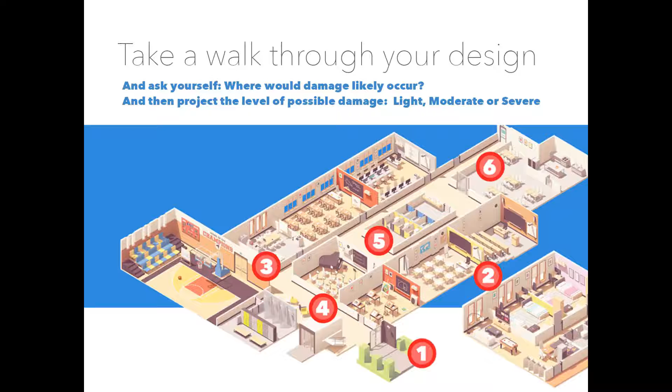And even if you go into your local grocery store or other, just throughout your daily life, I know with the position that I'm in now working at Inpro, I notice if there's scratches, dents, dings anywhere in doors and walls, it's almost a sickness, but you'll really start to notice those areas that aren't taken care of. So through that kind of observation and experience, you can provide a clear direction in identifying the location and types of interior protection that are needed.

So we'll kind of begin here with the guts of the building. You obviously know what drywall is. It's the baseline wall construction material. There's also cement board, which offers increased resistance to higher levels of abuse and may be used in moisture applications. So it's often used in selected areas that require that moisture resistance. You have fire rated plywood, which offers an increased resistance to higher levels of abuse and also a more secure fastening for mechanical systems to the wall, for example, like a handrail or a wall guard. Those are used in targeted areas to increase protection from known or anticipated heavy abuse.

And then CMU wall systems, concrete masonry units. These are the 2-hour fire rated walls often seen in school gymnasiums and mechanical rooms. CMU walls may be cladded with wall protection materials to help reduce the need for repainting or even soften the look aesthetically and look less like brick. They must, though, if you put wall cladding on them, be sanded to a matte finish with a thin coat of compound to prevent any telescoping through the sheet material. You don't want to be able to see the glue or the grout lines through the wall protection product. With CMUs, adhesive will take longer to set up for the installer because it can't evaporate as readily as with other substrates listed here.

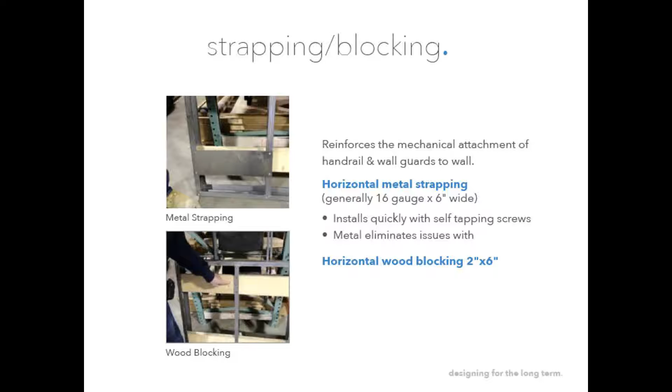So two main options would include metal strapping and wood blocking, which are spaced 16 inches on center with vertical studs. Metal strapping is generally done with 16 gauge by 6-inch wide material, plus a 1/2-inch layered plywood. And then self-tapping screws would adhere the handrail product or wall guard product to that. In the wood blocking scenario, usually 2x6 boards are used with a gypsum board 5/8 inch thick over the top.

So now we're going to turn our attention rather to the individual elements of wall protection and concentrate on two specific topics. The first being wall cladding. For wall cladding, just think of applying materials to protect large areas over the face of a wall, so big spaces. And then targeted wall protection would be the other. Obviously, as the name implies, this would deal more with products that are specifically designed to absorb impact and protect the underlying wall.

The first good example of a wall cladding protective product would be flexible wall protection. So with flexible wall protection, they're products that have really been gaining popularity. They're an 040 nominal thickness, which is as thick as many rigid wall protection products in the market. But they offer a nice aesthetic look and more of the feel of a vinyl wall covering. So if you're familiar with type 2 wall covering or type 3 wall covering, the flexible wall protection is the newest version of that. I like to refer to it as sort of wallpaper on steroids.

Flexible wall protection can withstand moderate abuse without looking like most traditional wall protection options because it's adhered to the wall similar to wallpaper. So it has that seamless appearance to it when it's the finished product. And what designers and architects have really loved about it the most is that it has a nice texture to it. Each pattern has its own unique texture, and there are many patterns and colorways available. We see it most often specified in both healthcare and hospitality applications. It looks great in common areas such as lobbies, meeting spaces, cafeterias or corridors.

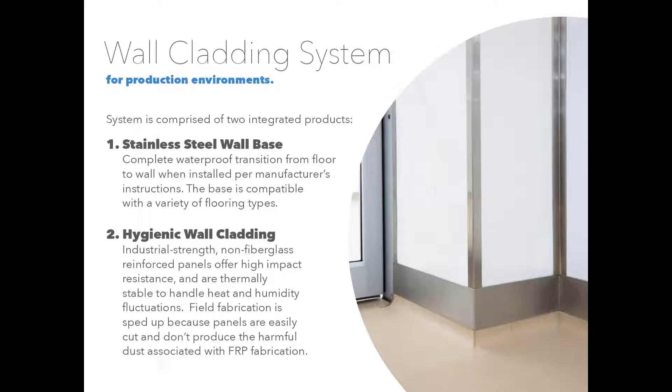Once it's installed, the product itself can be pressure washed, and intensive disinfectants can be used. So that's where we really see it as a nice sort of value engineered option to the solid surface product I just spoke of. It's less expensive, but still rated well for the environment that they're meant to go in.

What I would say has been the most popular product, at least from a designer's perspective over the last several years, would be printed wall protection. Especially when trade shows were a thing before COVID, this really got the most attention. So it's really a designer's best friend because it can add a personalized and customized element to any design space.

You can choose from high resolution images from a reputable online source like Getty Images, or you can provide your own custom photography, so long as it meets certain photo quality standards. You can't just take a cell phone picture with your iPhone and use it once it's blown up on a wall. But as long as your custom photography met a certain level, it can be done.

And then with that image, it is printed on the back of a clear PETG sheet. And that's really important because it's printed on the back of a clear sheet. If you scratch it or anything like that, that ink isn't going to come off. So your image is completely protected on the back side of the sheet.

Most often we see printed wall protection specified in common areas of buildings, such as an elevator lobby or even just feature walls. Basically places with a lot of foot traffic where you really want to show that art piece off and you want it to be appreciated. Nature scenes are really common. They obviously promote a nice biophilic design element for healthcare.

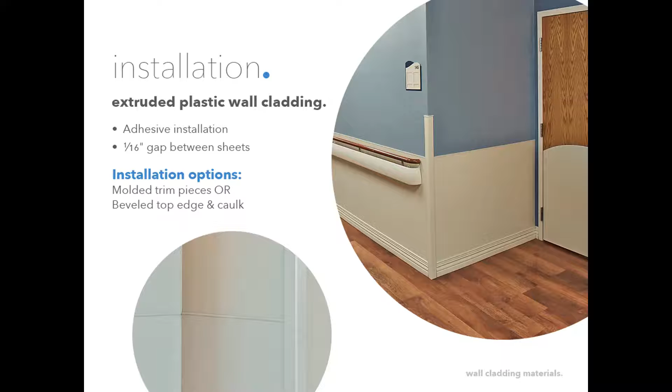Trim pieces are available to complete the look, or color match caulk can be used as well to help seal all the edges and seams. Regarding the decision whether to use caulk or trim, it's really up to the designer on what the look is that they want to achieve. An additional consideration in finishing the sheet, whether it be through the trim pieces or the color match caulk, there's really two factors that go into making that decision. I mentioned the aesthetic look of it.

The application of trims provides a more highly finished look to the installation, and caulks finish the seam only, but they do provide some appearance smoothing by making the seam look less visible, the color matching aspect of it. But there's also the cost. The installation of trims can be more expensive because it's more time consuming on the installer to do. And then obviously cutting the trims and placing them. So caulk can be a less expensive option, and less labor intensive.

One small bit of caution on applying trim to sheet, the trim pieces do protrude a bit from the wall. So it would be possible for a cart or gurney or wheelchair or something to snag and tear off that trim piece. It's rare, it hardly ever happens, but it can happen. Caulk may be the better finishing option for seams where the snag potential could be high.

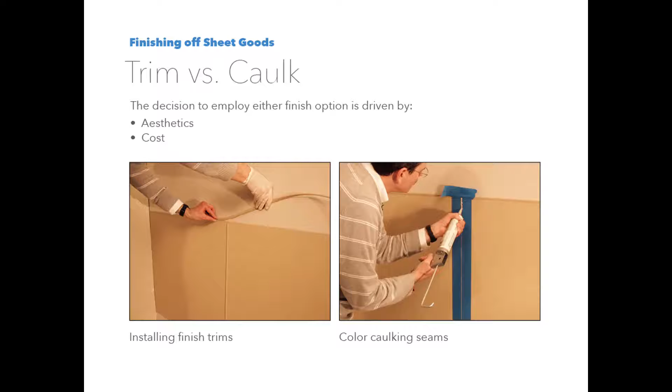I mentioned earlier that sheet wall protection can also come in rolled goods. And the main benefit of a rolled sheet product is the contractor then can determine himself or herself the length of pieces that they really need. So it can really reduce seams on the wall. However, we do still recommend that there should be no lengths greater than 12 feet without a seam to help allow for that natural expansion and contraction that can occur. Another benefit of rolls, if space is limited on a job site, or there's not a lot of storage space, rolls come in a nice, tightly wound box. So just another thing to consider.

It's a very durable product, sheet is. It's designed to last a lifetime. It's not a temporary solution. And it can stand up to common and harsh cleaning products, which is obviously especially important in healthcare. If in the future color trends change, or you may want to replace the sheet material with something new, the wall cladding can be removed, but it will take that paper layer of the drywall off with it. And then that sheet can no longer be recycled because there would be adhesive and drywall residue on that product. However, a solution, it is possible using a contact cement type adhesive where you could install sheet over the top of existing sheet.

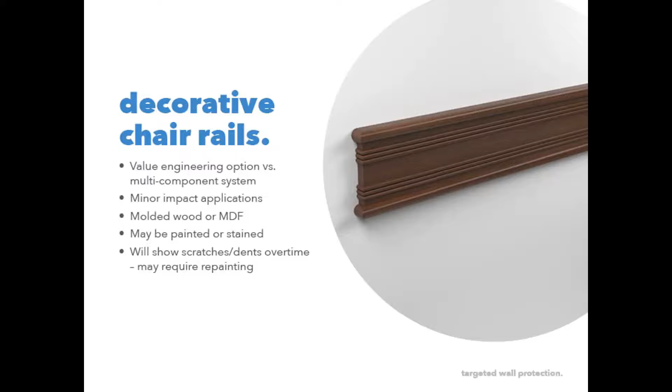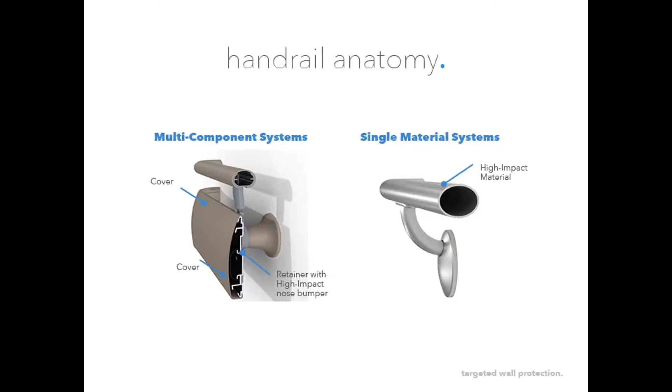So with handrails, there are tons of different shapes, sizes, widths, and different looks that you can get. But what's consistent among handrails is they need to have that similar gripping surface dimension in order to meet ADA code compliance. So obviously safety is first and foremost when it comes to handrails.

The traditional handrails are composed of an aluminum retainer, like a wall guard. You have plastic brackets that allow it to stick off of the wall, and then return pieces that, like the name implies, return back to the wall, holding it flush against the wall. Brackets are mechanically fastened to the wall, and they are tested to meet weight load requirements. Obviously, in a bariatric scenario, they need to be tested and approved for a much higher weight load requirement.

The polymers used in our materials are Class A fire rated, like all the other door and wall protection materials. Handrails are installed between 34 and 38 inches off of the finished floor, which is an ADA compliance thing. And the covers and returns can be easily replaced or updated as required. So if you ever wanted to change out the color, that's possible, or if you see damage done, it can be easily replaced.

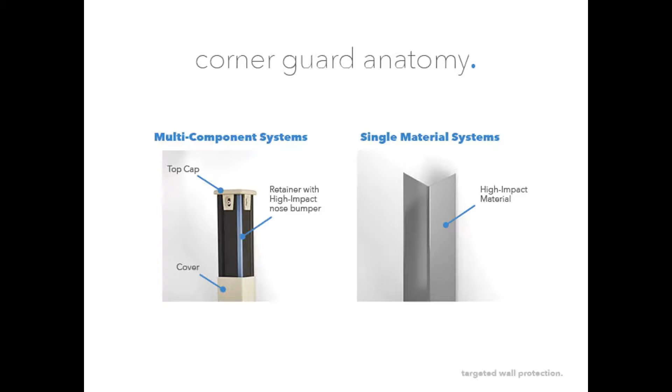Now we'll talk about corner guards, which is another very common industry product. And again, there's two basic types. There's your multi-component system for high impact abuse that has a retainer, a cover, and then a top cap and bottom cap to finish it off. And then the single material systems could be a tape-on or adhesive mounted plastic corner guard, or some other material like an aluminum or a stainless steel system.

Stainless steel corner guards have become increasingly popular from an aesthetic point of view, and they obviously can withstand really heavy abuse. So we see these in back of house applications or front of house applications. 304 or 430 alloys are available, which can conform to NSF standards for direct food contact. They can be installed with screws or with just regular adhesive.

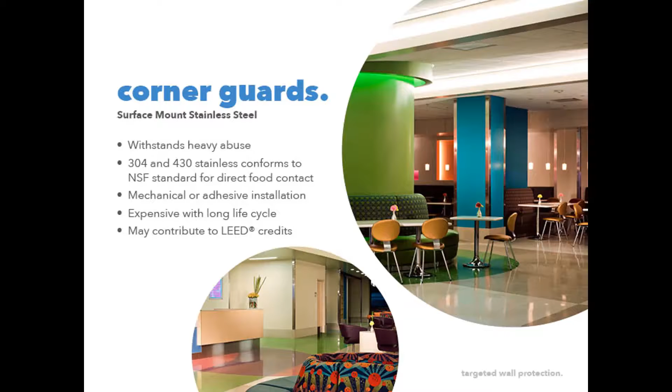They're often more expensive on the front end, especially given the supply chain constraints and the world we live in today. But they do have a very long life cycle. They can essentially last forever. And they may even contribute to LEED credits.

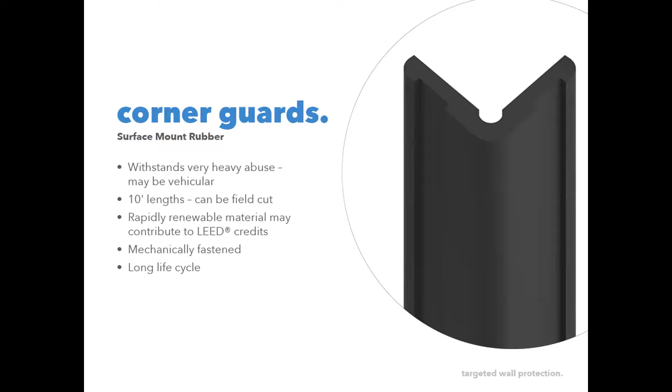Rubber corner guards are another durable material, used often for back of house applications. They can really take a heavy duty impact. They're sold in standard lengths and they're easily cut in field. Made from rapidly renewable sources and can contribute to LEED credits as well. They're recommended to be installed mechanically, so with screws, given the impact that they're designed to take. They have a really long life cycle, and we also see them used in parking garages as well. So rubber can be used in both interior and exterior applications.

Surface mounted multi-component system. So this is that retainer system I showed earlier, designed to take heavy impacts. And really there's two retainer options. The traditional one is aluminum, which has been used for decades, similar to the wall guards. But there's also plastic retainer options, which is really a win-win for everybody. Not only is it less expensive, but it can actually withstand a greater impact, because plastic is naturally flexible and less rigid than aluminum.

It actually gives the corner guard itself better shock absorption. It can take up to 4 times more abuse than aluminum can. So I talk to customers all the time about that. It's really a win-win for everybody. It's less expensive and a better performing product. Then a cover is snapped over the top, available in many colors and finishes. And then the top and bottom caps help hide the retainer.

Corner guards can either go full height on the wall or partial height. They can go over the base trim, or they could stop at the base trim. It's really up to you, the designer or architect, to determine what you want that aesthetic to be.